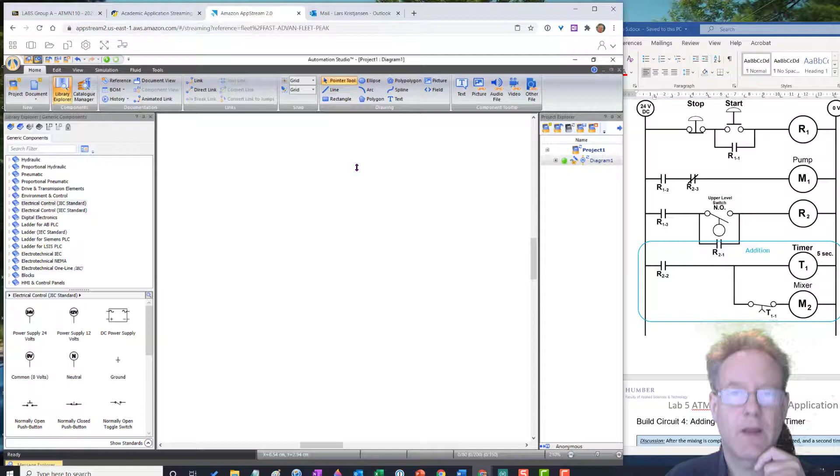So I've opened up Automation Studio and we're going to build this circuit. So this is the circuit for lab 5 that you need to draw, and that's the circuit build number 3. Okay, so I know it looks a little daunting, but we're going to do this together. Essentially, I'm just going to do it right now and you're just going to watch what I do and follow it. Okay, good. So we need to start with our rails, 24-volt rails.

So I'm going to go over here to electrical stuff, and I'm going to go to JIC standards, Joint Industrial Council standards. Okay, good. So, okay, let's build lab 5 together. I have Automation Studio open. We're going to build lab 5 together. I need you to build circuit 3 for lab 5, and I will walk you through every single step. So it looks a little daunting, but you'll see it just goes quick, bang, bang, bang, as soon as you kind of get into a roll. So let's get on it.

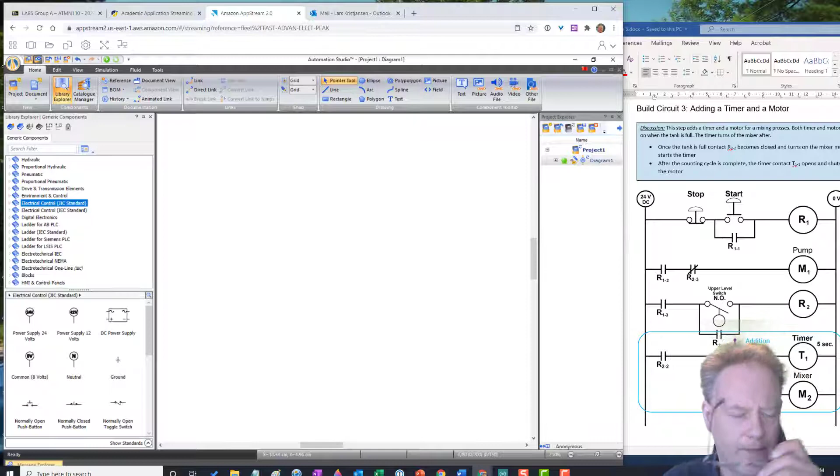So the first thing you need to do is draw the rails. So I got 24 volts and 0 volts, so I'm going to go for 24, and I'm going to drag that and put that right there, and I'm going to grab a 0, and I'm going to put that maybe over here somewhere because I need a little space. Okay, so let's start going. So I need a stop-start station with a holding circuit.

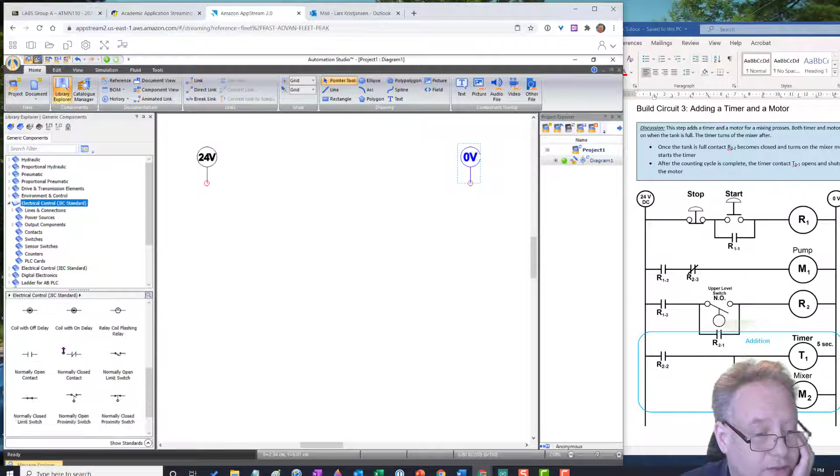Okay, so now I'm just going to open this up a little bit here. Now, in the main section, you have a lot of different things, and a lot of the things that you're going to use for this are all here. But I'm going to go into the specific menus that we need to look for these things. So I need some switches. So I'm going to go to switches, and I'm going to open this up. Actually, I need a normally closed first because I put my normally closed first.

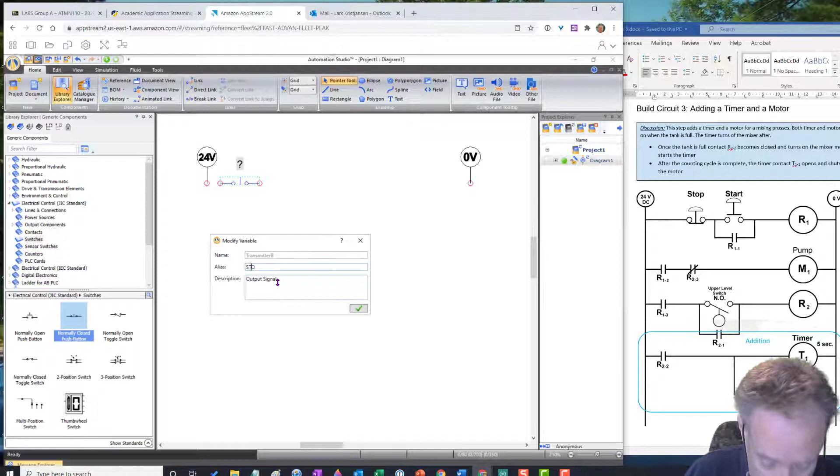Okay, good. So, it wants to know what it is. Yeah, it's called stop. Oops. Okay, good. So I'm going to call it stop, and I'm just going to hit that, and good. Now I want a normally open. I'm going to put that guy in there, and that's going to be called start. Okay, so I'm using capitals. You don't need to use capitals specifically.

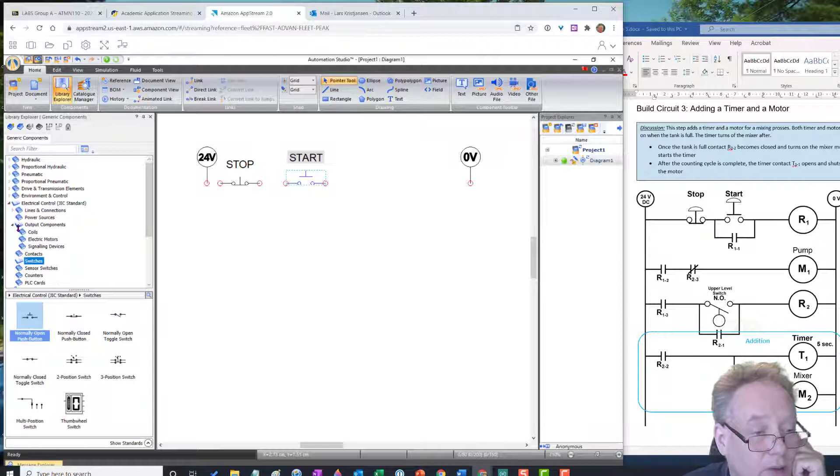And now what I need is, I'm not going to do this contact first because I actually want to have a relay coil first. That's my relay coil. So I'm actually going to go into here. I'm going to go to output components, and I'm going to go to coils, and I'm going to grab a coil, and I'm going to drag it over here. And now it wants to know what it is. I'm going to call it R1. Okay, good. So now I can actually put a contact in here.

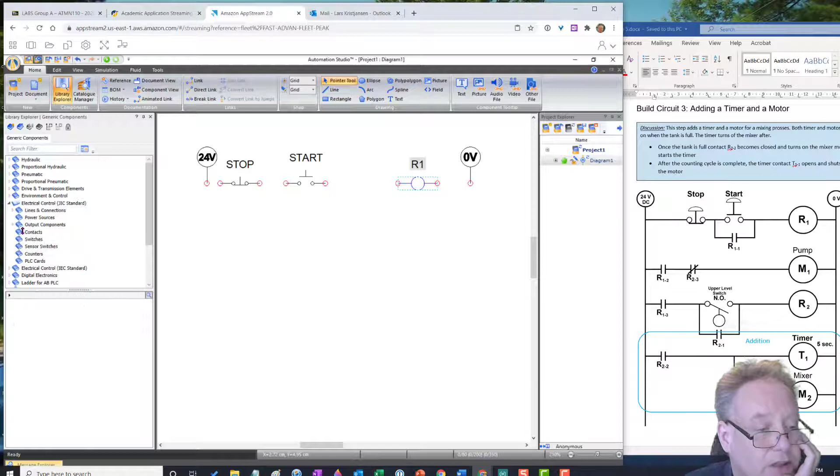Again, I'm going to go back over to, I'm going to close this. Going back here, I'm going to look, there's contacts. Now I can just go here and I can grab a normally open contact. It'll be down here, but I'm going to use these menus just so you get used to it. Okay, so output components, contacts. Good, I want a normally open contact. I'm going to put it here. Now, the normally open contact is associated with R1. So I'm just going to double click on this, and it will be called R1.

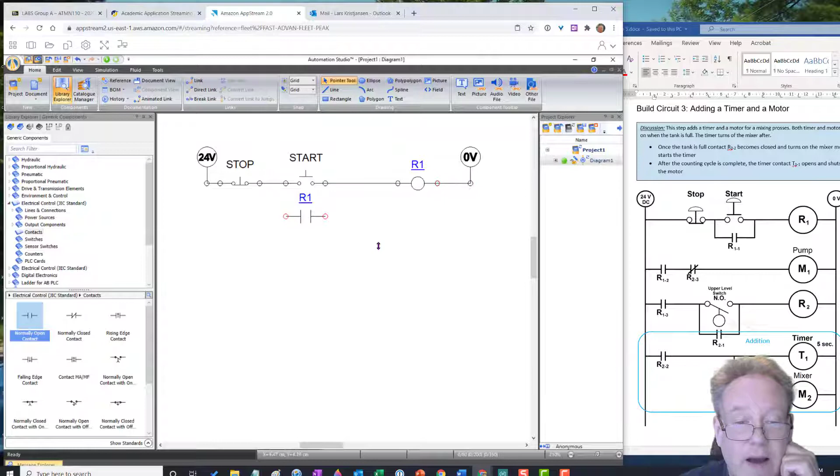Okay, good. So now all I have to do is put the lines in. So I'm just going to click anywhere. Now I'm going to go from here to here, and then from here, so I click on this, and then I click on that. I click on this, I click on that, I click on this, and I click on that. Now, if I wanted to, I could move this over. I'm actually going to move this just a little bit. There you go. So now I need to go from here to there, and from there to there, and now we have our first rung.

The second rung starts with a normally open contact, and it goes to the motor. Now that normally open contact is associated with R1, so that's not going to be a problem.

I'm going to dump that in there, and it'll be like, hey, what's it associated with? But it's R1. I'm going to double click R1. Okay, good. So done. Now I've got that contact. Now this is the problem. That is a normally closed contact, not a problem.

I can put this here, but the thing is, there is no R2 yet. I haven't put it into my drawing yet. So I'm just going to call it R1 for now, and then I'll show you how to change it in a bit. Okay, good. So we can move forward and put a pump in there.

Now the thing is, I can't put a motor in there with the IEC, but I can just put another output device here. So I'm going to go to output components, and I'm just going to go to a signaling device. I'm just going to put a lamp in there because I can't actually put a motor in here. So I'm going to call that motor 1, or pump 1. So I'm just going to call it M1. So motor 1. I'm going to close that. That's no problem. Now I can finish off this rung.

So I'm going to go from here, and I'm going to go up to here, and you can see this thing kind of wants to jump to at a right angle. So I'm going to click there. Now I'm going to go from here to there, and from there to there, and then from there to there. And then if I want, I could grab this whole thing and just move it up maybe just a little bit. Okay, good. So let's make this next rung.

Okay, it looks like we need a contact. Again, I'm going to go to my contacts, and I'm going to go for normally open. When I place it there, it'll want to know what it is. It's associated with R1, and that's fine. Okay, and I'm going to close that. Now I need a switch. So I'm going to go to switches.

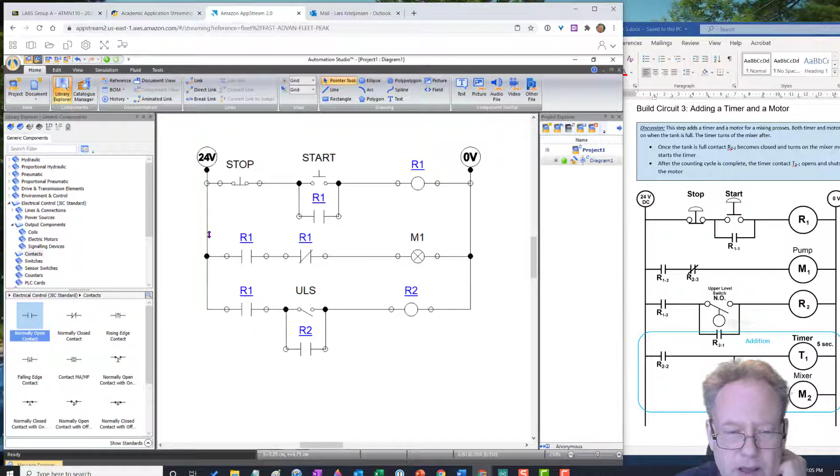And by the way, you don't need the -1, -2, -3. So I'm going to double click on it. Now I'm going to highlight my R2. And then I'm going to go over here and I'm going to say create link. And it turns into R2. But if I want to put it back to R1, I hit R1 and then I say create link.

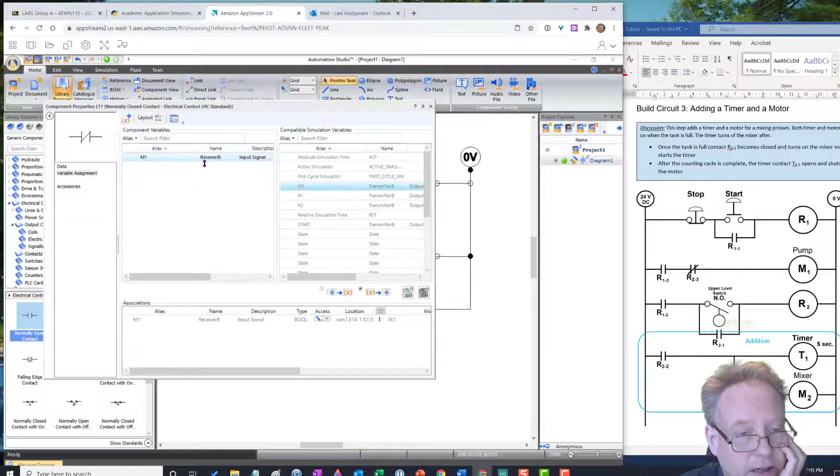I can actually even connect it with the motor, so it becomes closed when the motor energizes, which is not really what you're supposed to do, but you can do it. And then I can do this, create link, and now it's M1. So I'll go back to R2 because I want it to be R2, and I close it.

And now that's R2. Again, we don't have R1-1, R1-2, R1-3 like we do here. And let's continue on building. So essentially, I need to add another rung here. So it looks like I need another normally open contact, and I'm going to put that there. And that's going to be from my R1. No, it's from my R2, pardon me.

So I'm going to double click on that, and we're done. Now, I need a timer and a motor. So I'm going to put my timer in. And watch this, this is pretty cool. Timers are not actually timers. They're coils with on delay and off delay. I want an on delay coil because my timer is an on delay. So I'm going to put that there. Now, I'm going to call it T1 and we'll set the time a little bit later. I'm actually going to move that up just by 1 because I don't think they're even.

Okay, so now I'm going to connect this guy. Again, I can't grab onto that, so I'm just going to click here. Now I'm going to go up here, double click. Whoa, I want to go over here and then up. Double click. I'm going to go from here, double click. Now I'm going to go from here over to here. Now what I want to do is put another component here. I want to put a mixer. Oh, and I have to put a timer contact in here too. So I'm going to put another mixer.

And all I'm going to do is, again, go to my output components, signaling devices, pardon me. And I'm going to call this M2. Okay, good. So now I'm going to click here and finish this off here. Now I'm going to double click. Whoa, I want to bring that there and double click it. Okay, good. So now I want to bring this over to here, click here, then click here, double click here. The reason I'm doing that is because I want to add a component in there.

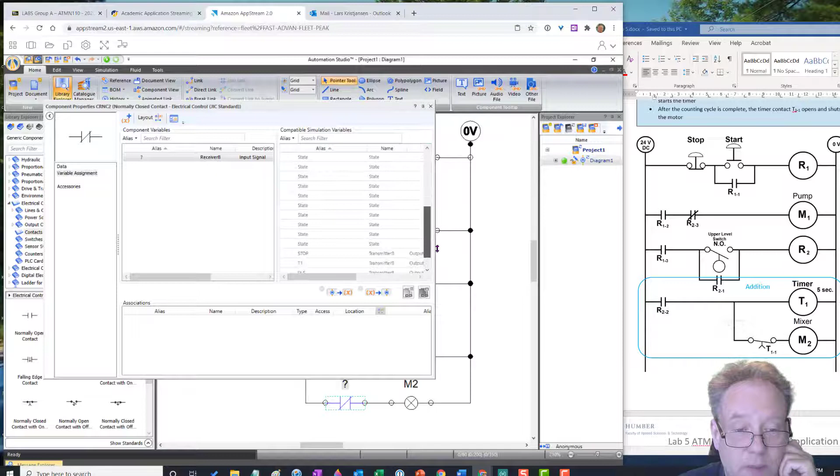Now that's one way to do it, but I think I'm going to have to cut that anyway, but we'll see. We'll try and put a contact in here. Now, the timer contacts in Automation Studio are just normal contacts. So I'm going to go back to my contacts, get a normally closed contact and dump it in here. I want to see if it just links in. I don't think it does. Now I want to associate that with timer 1. So where is timer 1? Well, all of these are alphabetical. Timer 1. So double click on it, close it.

Now, I don't think that's connected, or maybe it is. The way I can see it's connected is I can drag this up. And it did. It dragged it up and dragged it down, so it is physically connected. That's right. Okay, so you can dump that in there. The old Automation Studio version, you couldn't do that, but this one you can. Okay, good. So that's nice. And, oh yeah, we're done this part.

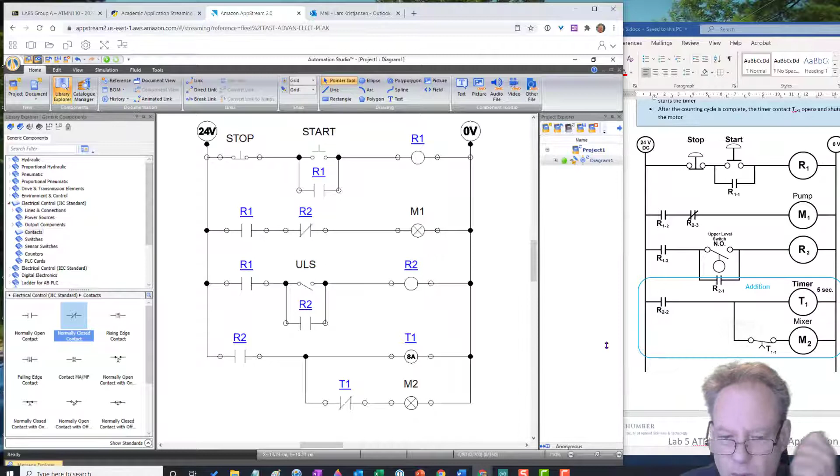So what I can do is simulate it now. Watch this. I'm going to go to simulation mode up here and open this right up. Okay, so when you do that, Automation Studio thinks a little bit. So my upper level switch should be open. Now, watch this. I can toggle this, and I can change it. See, I can change that. So what I'm going to do is press start here.

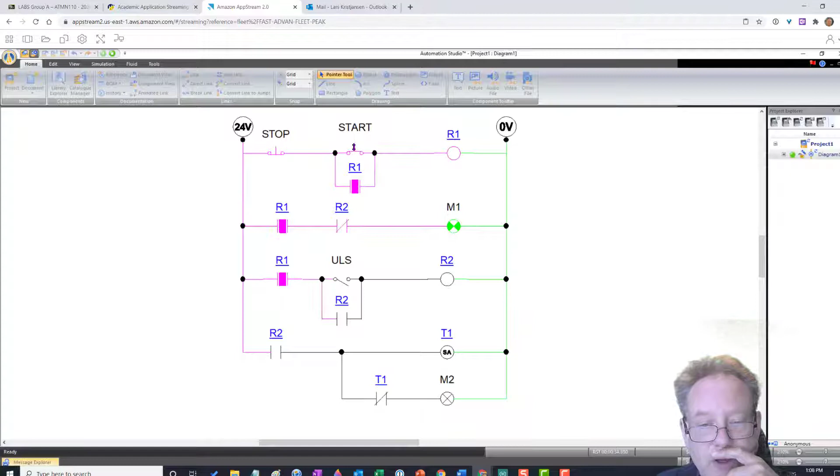That'll close, and this motor should come on. Oh, but that's not energized, right? We're not seeing any current go through that. These will light up when they have current going through them. Okay, let's just press play. Cool. So now my motor's coming on. Good. So the tank is filling.

It's going up and up and up and up. When it gets full, I'm going to close this. Then what's going to happen is that's going to close, and then my timer's going to start to count. And this is going to also come on at the same time, the mixer motor, and then it will stop. Ready? Here we go. It's full.

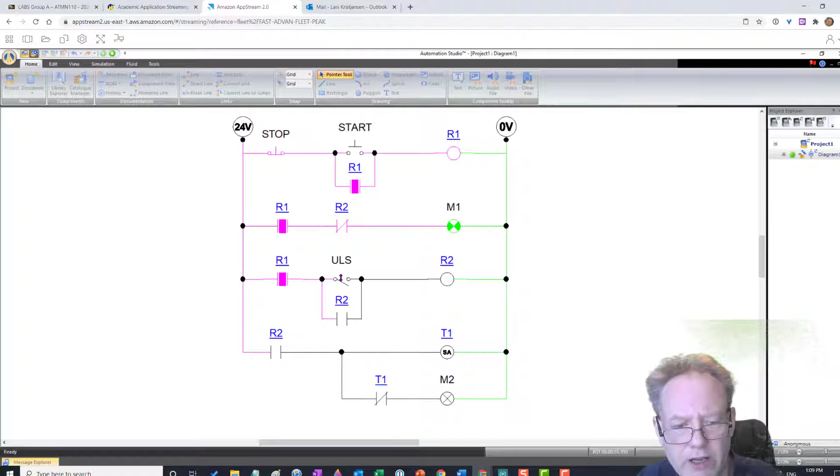Tank's full. Okay. So the mixer motor comes on. Oh, and it stopped. It only came on for a second. Oh, yeah, that's right, because I didn't set this. So when you click on this, when you're not in run mode, it opens this, double click it, and you go in here, and then you click on data, so you can change it. But there's nothing available.

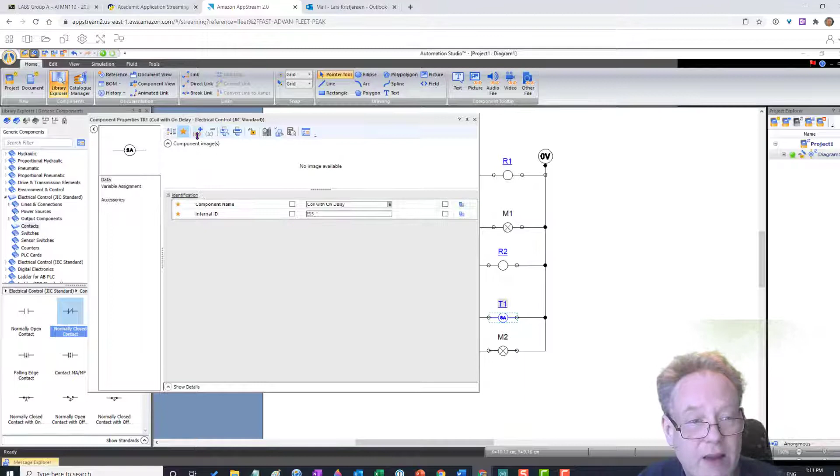And the problem is, see this star? If I click on it, it shows all properties. So you have to make sure, if you can't see the timer setting, you click on this, and then that gives you access. Oh, so it's just 1 second. I want to kick that up too. I want to kick it up. Does it go? No.

Okay, so I have to change that like this. I'm going to go to 5. Okay, good. So now I can just close this. I don't have to hit save. Let's run it again, and we will see. So I'm going to start it. Now it's filling. The motor is coming on. It's filling. I'm going to close this, and there.

That came on. It should have come on for 5 seconds. Let's try and count that. I'm gonna look at my timer again. I'm gonna go to data, and I'm gonna go to here. So that's 5 seconds. I'm just gonna make it like 10, because it didn't seem like 5 seconds. Okay, good. So I press play again, and I'll do this.

Okay, the motor's coming on. It's full. When it's full, this will come on, and the motor will come on at the same time. When the motor's done, this will become open. So close. 1, 2, 3, 4, 5, 6. Oh, okay. So that was pretty quick. 10 seconds. I'm not sure exactly what's going on or why it's doing that, but let me just double check this.

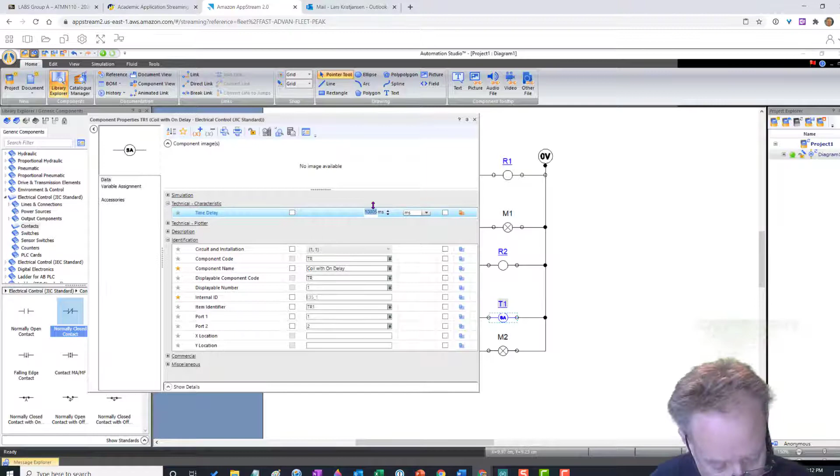Okay, my timing, that's milliseconds. Okay, minutes. Do you know what? Milliseconds. You know, I'm just going to go to milliseconds, and I'm going to say, can I do this? Oh, okay. I'm going to go for 5,000 milliseconds, and then I don't know. We'll see what happens. So that's 5,000. Yep. Okay. So I'm going to press play. I'm going to close this.

The motor comes on. It gets full. 1, 2, 3, 4, 5. Bam. Bam-o, shmam-o, damn-o. Whoa, it's not happening. I'm not sure what's going on. Oh, it did. It just took a little longer. You saw that? It stopped? Okay. So I just don't know how to count to 5.

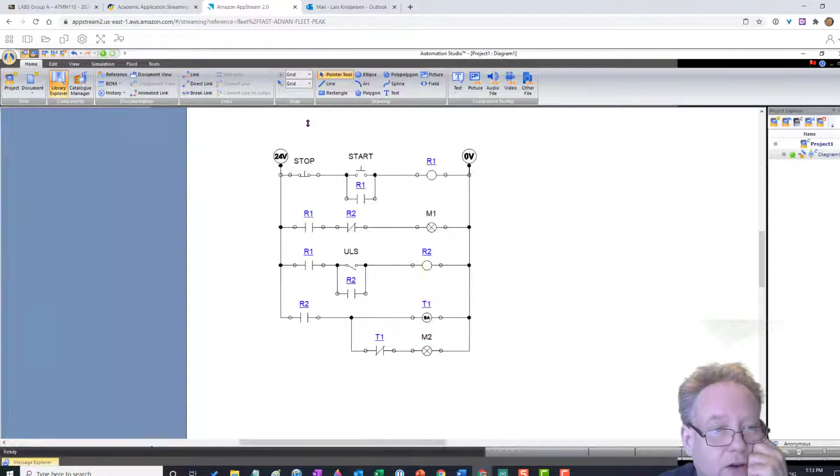Okay, good. So I'll fill it. And 1 Mississippi, 2 Mississippi, 3 Mississippi, 4 Mississippi, 5 Mississippi, 6 Mississippi, 7, 8. It almost seems like the clock is doubled or something. Anyway, it's working. That's how you build your circuit. So you're going to build this circuit, and then you're going to save it.

You go up here, and you go Project, Save As. Now, this is important. Go into this PC, and then go to temporary files, and then name it whatever you're going to name it. So this is going to be Lab 5. Okay, good. Section 3. I'm going to just call it Section 3 or Circuit 3 or something. Okay, so I'm going to hit save.

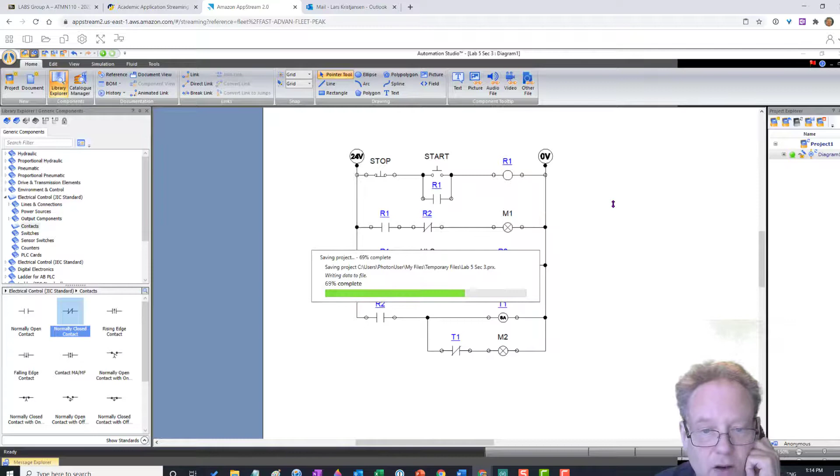Okay, so now you need to download this file onto your computer so that you can upload it to me. The way you do that, you go up to here, and you go into the AppStream, and you click on this guy. I think you've already done this, and go to temporary files, and then you're going to have the file. Now, it's the largest of all of the files. So this is the one, and then you want to download it, and then you'll have it on your computer, and then from there, you can upload it. So that's how you do it. You are now an expert, and you're good to go.